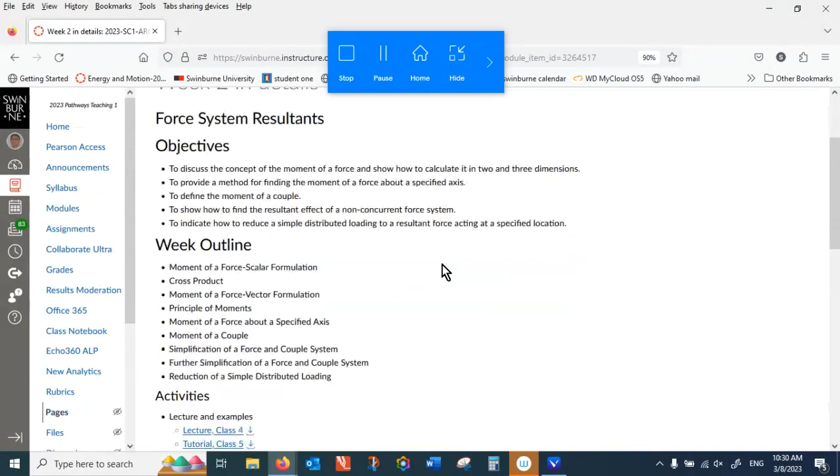Nijil, you're an international student, are you? Yes, from India. And you plan to go to higher ed once you finish this diploma? Yes, I'm planning for electrical engineering. Oh yeah, they'll be lucky to have you. Thank you.

And what about you? What discipline do you want to do? I'm doing software engineering. Oh, that's good. And have you done any programming before? No. So will it be hard if I'm not familiar with that?

Yeah, there is something called algorithm. If you're familiar with algorithm, that is the systematic thinking of how programs work. Loops, repeat, movement of the command or something like that. And then few languages, computer languages, are more useful than the others. In my time, I did computing, Fortran was very good, and C language was good. I chose Fortran, but Fortran these days is not used as such.

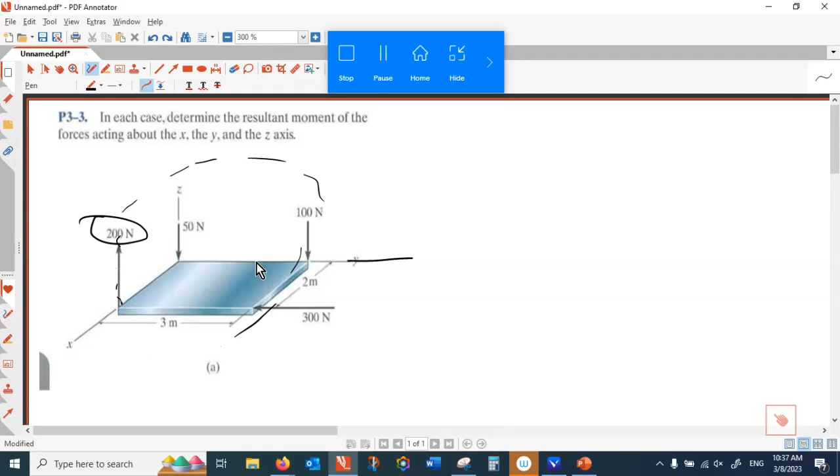Okay, so the moment due to 200 is... is this positive y or negative y? Just take your four fingers to follow the direction of rotation, and your thumb would be opposite to the y direction. So if I want to write that in vector, don't worry, I'll explain.

So this is the magnitude. Magnitude is 200, and the radius is 2 meters. And that makes - just use your right hand, 4 fingers following the direction of the rotation - 200 with respect to the y, your thumb would be opposite to the y. So that is minus j.

So it's anti-clockwise, right? Don't worry about clockwise, counterclockwise is only when you want to add the scalars. So when you don't know how to add the scalars, clockwise, counterclockwise help you to classify them, and this is a convention. But this is about the vectors. Vectors are with the unit vector, and we are using the right hand rule.

And let's see what 50 Newton does. The moment of 50 Newton, does it make any rotation about x? It's colliding with x, it doesn't. With y, colliding with y, doesn't. Colliding with z. So that 50 Newton doesn't make any rotation with respect to the x, y, z. So that's 0 moment.

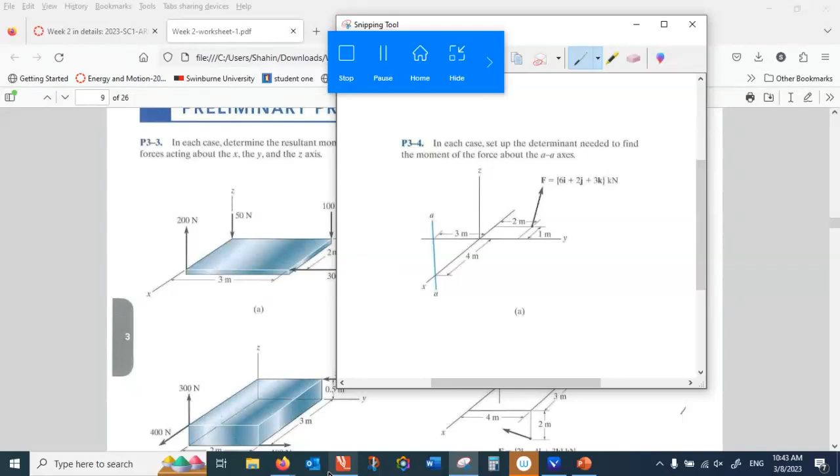All right, here we want to find out the rotation about an axis. Rotation about an axis is a scalar. Rotation by itself, moment, is a vector. If you want to project it over an axis, what do you do? You do a dot product between the rotation vector and the unit vector of that axis. So in another term here, I have a unit vector of AA - a unit vector for AA as an axis of rotation. So axis of rotation - you remember these doors have a hinge. So axis of rotation is that the door can rotate not about a point, but about a line. That line we call the axis of rotation. Here, AA is like a hinge for a door - that's not a point, that's a line. The door is rotating about a line.

Yes? Yes? All right. So here, two different things I want you to distinguish. If I say, what is the rotation about point O? Okay, that's a vector - it can rotate about X, Y, Z. It has three components. But if I ask you what is the rotation about the axis of rotation, that's not a vector - that's a scalar. And how do we find it? So first you have to find...

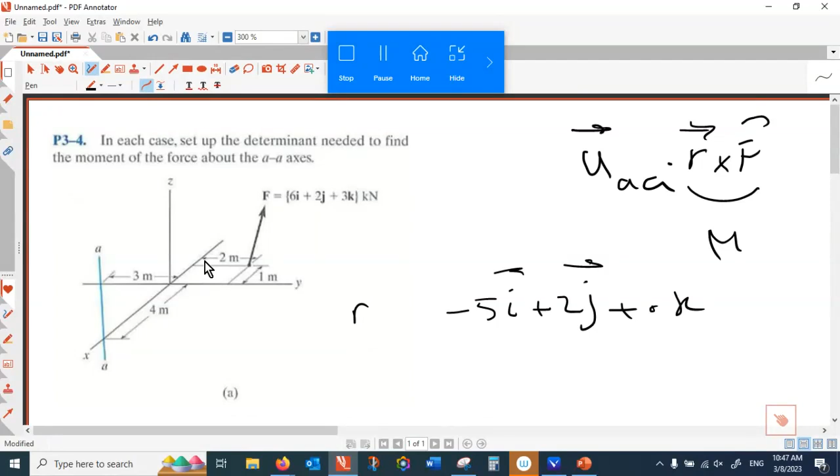That's a position vector, plus 0k. That is r, the position vector which connects the vector to the axis of rotation. Any line connecting them could be used - that's the only line we have. And then the force components, we have it.

And what is the unit vector of AA? AA seems to be parallel to Z, okay? So the unit vector of AA, that is equal to K, isn't it? This is parallel to that, that is unit vector.

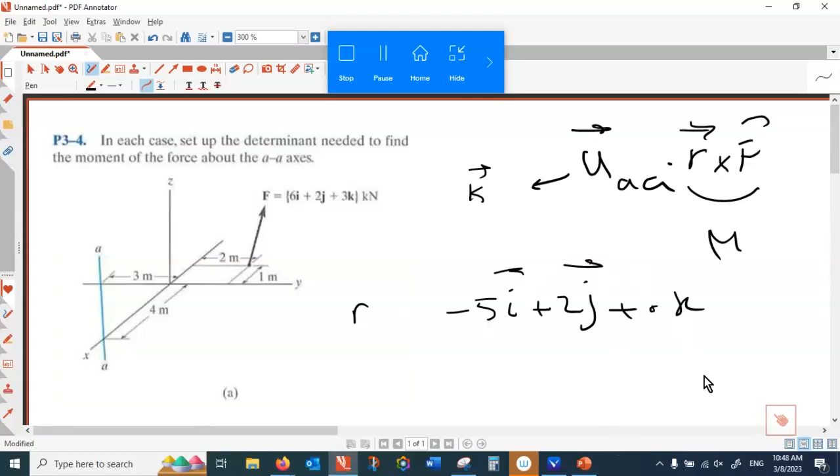So if I want to write this, first, the moment about that axis, you make a determinant. Here the first row you fill in with the R components, -5, 2, 0. The third row you fill it with the force component, 6, 2, 3. And then if you pre-multiply that by K, take it as a recipe.

When you project a moment with respect to an axis, that's what you get. What are we calculating here? Let me explain. This is UAX, UAY, UAZ, RX, RY, RZ, FX, FY, FZ.

So just in the top row, if I want to calculate the moment as a vector, I have i, j, k. But when I want to project it over a vector, I take that ijk away and put the unit vector of the axis here. And then the outcome of this is not a vector, this is a scalar. So instead of ijk, I put the direction cosines for that here.

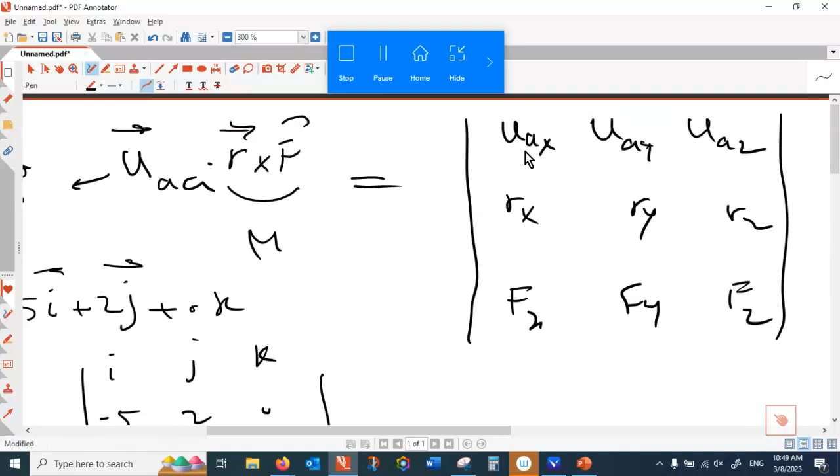So if I go with that, this is for the axis of rotation 0, 0, 1, and for the position vector -5, 2, 0, and the force 6, 2, 3. That determinant, the outcome, is a scalar, it's not a moment, because that's rotation about an axis. Rotation about an axis is not a vector. This is a recipe, I can prove it for you.

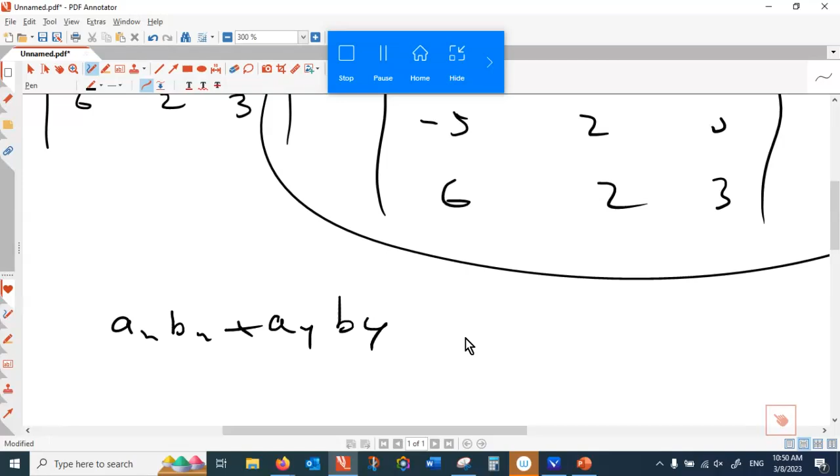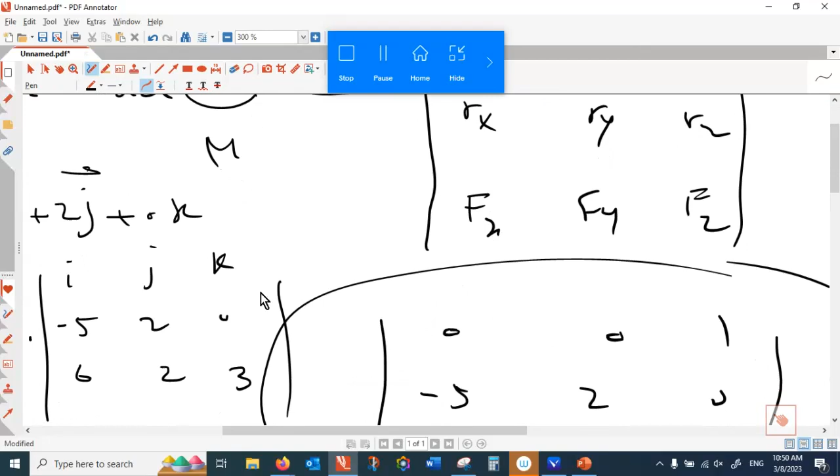When you pre-multiply a unit vector by another vector, remember we had this: if two vectors are dot product, that's ax*bx plus ay*by plus az*bz. That's when you dot product two things. The very same thing happens here. You are pre-multiplying the unit vector of that axis with another vector, and if I want to write this, that's a convenient way of doing that. You construct a determinant.

In that determinant, you fill the first row with the unit vector of that axis, the second row the components of the position vector, the third one the components of the force. So what you take from this exercise, I want you to just think about the concept, don't worry about the number crunching.

The concept: what does it mean if I have a force about a point? A force about a point can make a three-dimensional rotation. That three-dimensional rotation is a vector. We call this moment, moment about a point. If I have a force and then I have a line, this force with respect to that line produces a rotation, but that rotation is not a vector, that rotation is a scalar.

This is like I have a door, right? This door can only rotate about this axis. It cannot rotate like this, it cannot rotate any other way, it can only rotate about an axis. So no matter how I apply the force, it only can rotate like so. If I push it normal, if I push it at an angle, it only rotates like that. So that is rotation about an axis - this is a scalar, it's not a vector.

But if I only hold this from here, one fixed point, and a force - if I change the angle of the force, the rotation changes, right? So that's when you have a force and a point, the outcome would be a vector, a three-dimensional rotation. But when you have an axis, pushing it, no matter how you push, it only can rotate about that one.

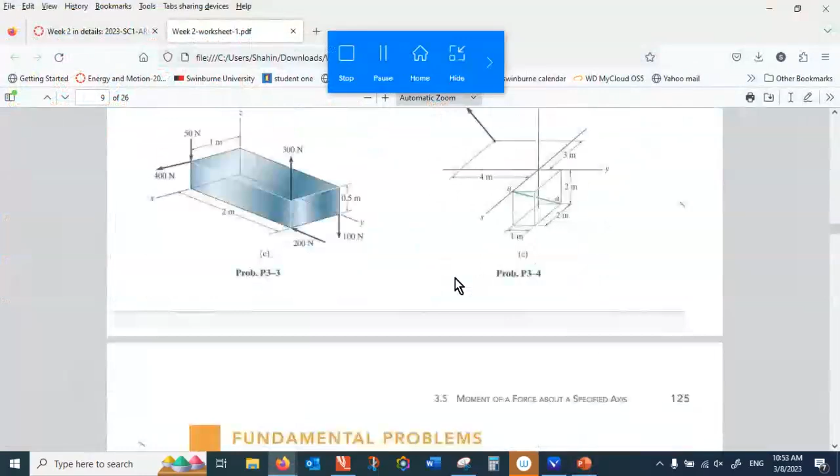All right, here in the first example, that is a force with respect to a point. Is that a vector or a moment, a scalar? F3-14, a force, a point of rotation. This would result in three-dimensional rotation, right? So that's a vector. How do we find it?

You have to define a position vector. Position vector is OB, and you have to write a force. The force is also provided as a vector.

And let's go to, for example, 17. So a force about AB axis. Is this a result in a scalar or a vector? That force compared to a line about the axis of rotation. Axis of rotation is AB. Is it? It only can rotate about that line. It's not a three-dimensional rotation. That's only. This is a hinge. The brick would rotate about that axis. Can you imagine that? Yeah.

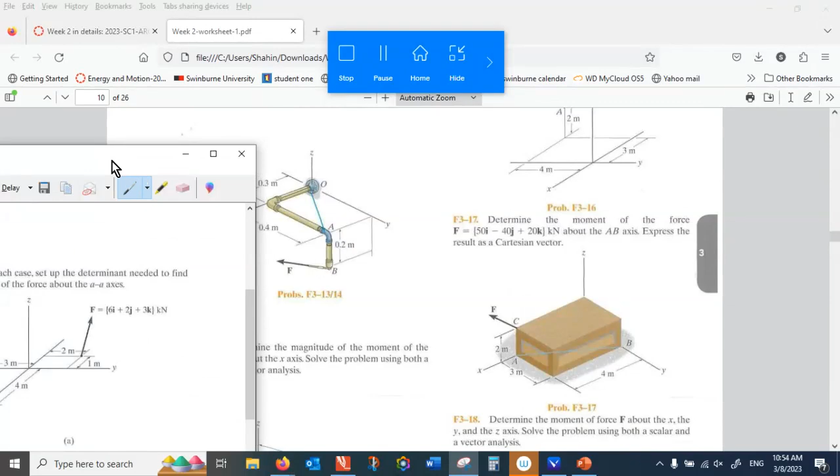All right. So how do we do it? I can do the number crunching or show you how this is done, but more importantly, I want you to get insight. If I ask you this force with respect to O, that makes a three-dimensional rotation. That's a vector. If I ask you the force with respect to AB, that's not a vector. This is a pure rotation. That's a scalar. Okay, how do we find this one? Let me write down the formula for you. So this is a good problem to get the concept.

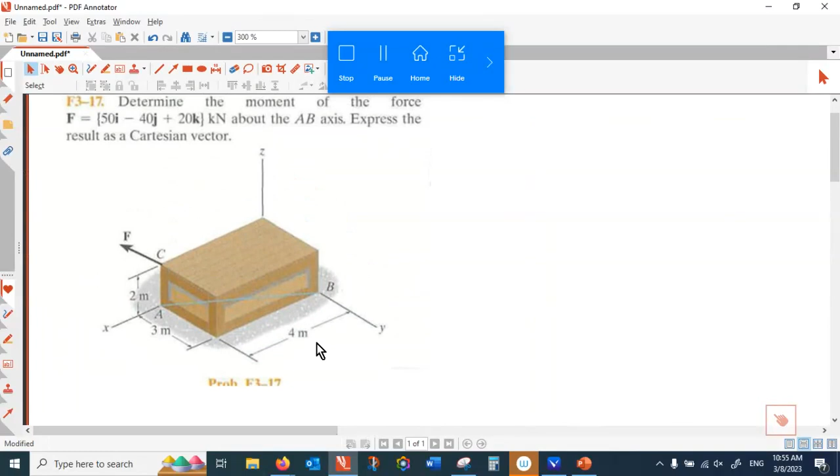All right, so what do I need is the unit vector of AB. I need that. And then I need the position vector. I have to connect from C to any point of that line. So it could be CB, it could be CA, it could be anything, right? So I need a position vector, and that position vector, I extend this one, and the position vector could be any point from this line of action to that vector - could be CA, could be CB, even it could be a point from here to there. But the only points we have coordinates for are A and B.

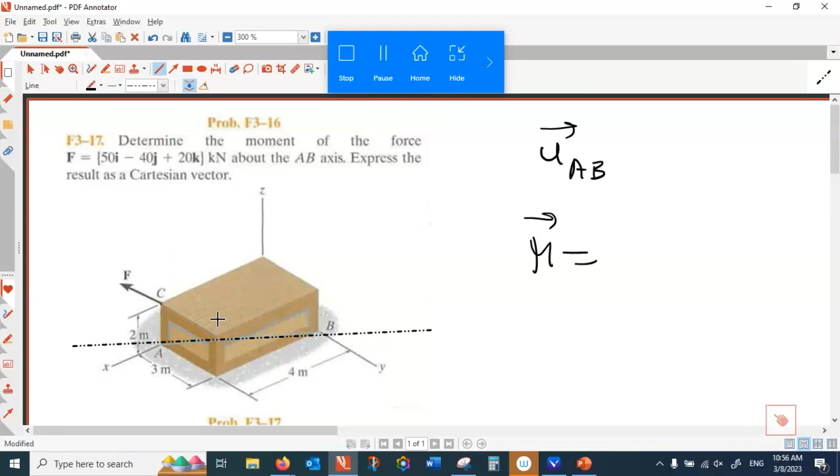So which one is easiest? Is it easier to describe AC or BC? Which one is easier? AC is easier, right? So AC, I take that as a position vector. So that is R multiplied by F. Okay? And then that is UX*I, UY*J, UZ*K.

So to find out, this is rotation about a point. How do I find rotation about the axis? Rotation about an axis, I have to pre-multiply UAB by that product. And how this is written, that is, you make a determinant. In the first row, you fill in three components of the U, UX, UY, UZ - these are for AB, the axis of rotation. In the second row, you put the coordinate of R: RX, RY, RZ. In the last row, you fill in the components of the force, Fx, Fy, Fz. So apply to this case.

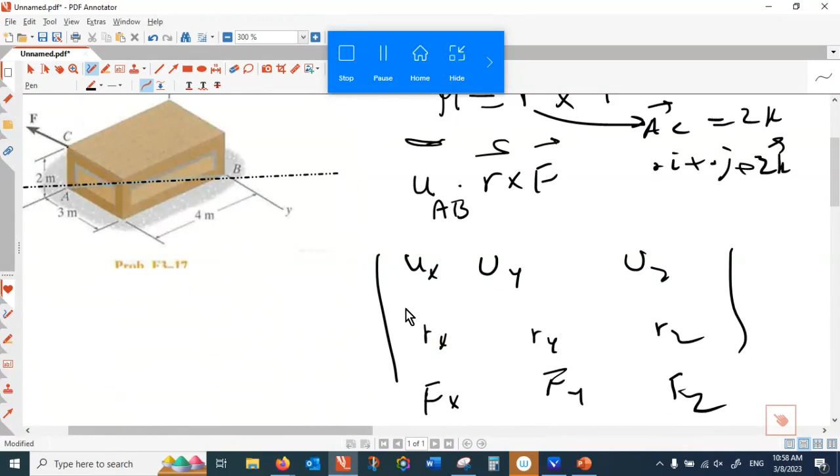Okay, we easily can find the unit vector of AB. You know how to find the unit vector. And what is the position vector? You suggested the position vector connecting the force to the axis of rotation to be AC. So that is AC. This is taken as AC, and AC is what? AC is 2K, right? And 2K is 0I plus 0J plus 2K. So when I want to fill here, I put 0, 0, 2.

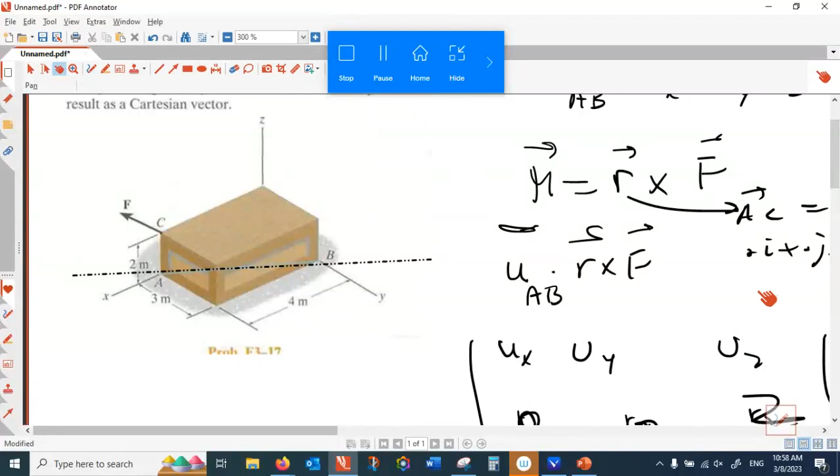And when I want to fill in here, I put... Sorry, can you just read this part again? Where you wrote 0, 0, 2? Which one? How did you write 0, 0, 2? How did you do it again? Okay, you want to go from A to C. What is the vector? You just go 2 meters along the K. That's 2K. 2K has 0I, 0J. So if you write that vector in a three-dimensional case, this is 0I, 0J, 2K.

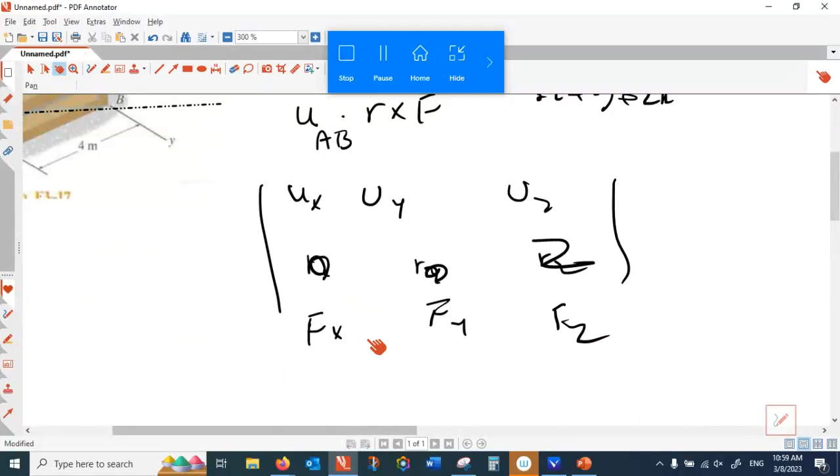And then you fill here 0, 0, 2. Right? Okay, and finally F, where are the components of F? The components of F are 50, minus 40, 20. And what about the unit vector of AB?

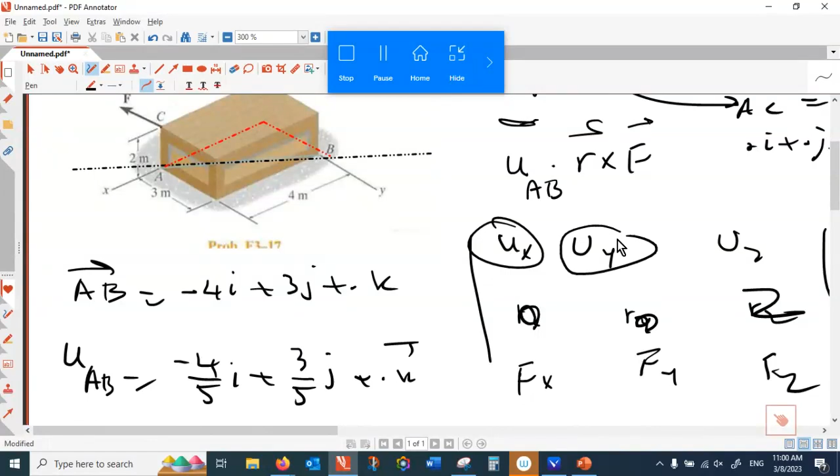I can show you quickly the unit vector of AB. You want to go from A to B. How do you go there? I personally go minus 4 along the X direction, followed by 3 meters along the Y. So in that journey, AB is minus 4I plus 3J plus 0K. Okay? And then the unit vector for that, using 16, 9, 25, 5... the unit vector is minus 4 over 5 I plus 3 over 5 J plus 0K. Right? Now I put these components here: minus 4 over 5, 3 over 5, 0.

All right? Not a big deal. I mean, it looks very hairy and scary, but once you understand the difference between moment about a point and moment about the axis, it's straightforward.

One is making three-dimensional rotation, the other one makes the scalar. How to calculate the scalar? Don't worry about the derivation, exam is not about derivation. All you need is that formula. You pre-multiply the unit vector of the rotation axis by the vector of rotation. So vector of rotation are Rx, Ry, Rz, Fx, Fy, Fz. And the first row, you only put that of the unit vector for the rotation of axis.

Could you go to the slide again? Yeah, let me go there. Yeah.

Why did you choose engineering? The other class, whatever subject they're having, fun, listening to music, while you are doing tough things.

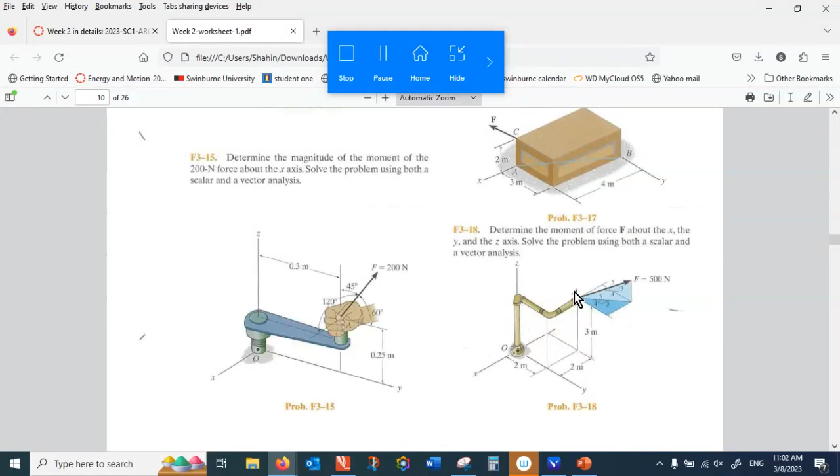Well, the very same thing here. With that problem, can you tell me 200 with respect to O? Is that a vector or is that a scalar? Vector. And 500 Newton with respect to the OA, is this a vector or a scalar? Okay, good.

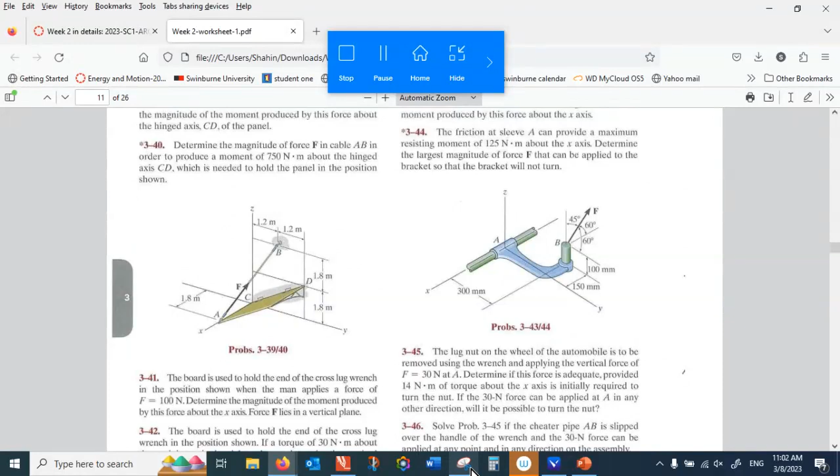All right, so this is easier to visualize. I mean, that's a star question. It means that's super complex, but for you, that should be piece of cake.

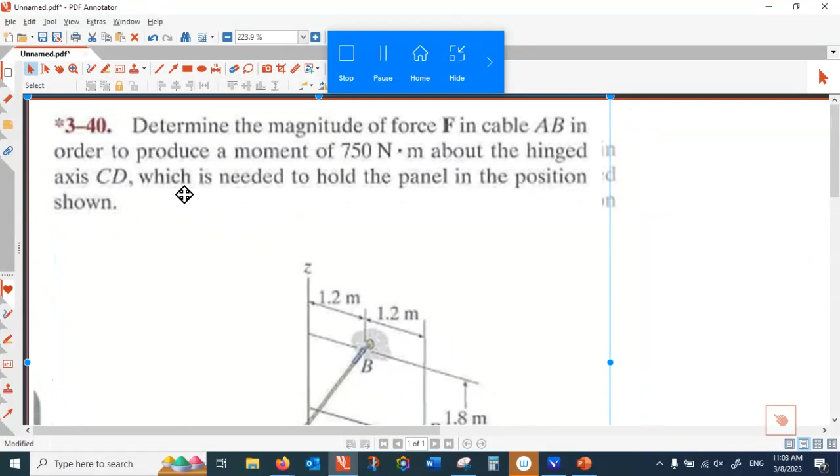Okay, let me summarize what you missed. I want you to make a difference between two different concepts. One concept is you have a rigid body, this is a rigid body, and with this rigid body, you can only fix a point, only a point, right? So it means it can rotate, it cannot translate.

So if you want to push it in the X direction, you can't. If you want to push it Y, Z, it can rotate. It is only free to rotate, rotate about the X, rotate about the Y, rotate about the Z. But you can't move it, not translate. Translation you cannot, because this prevents that from translation. But rotation you can, rotation about that point.

So if this object is fixed at a point and you apply a load, it makes a three-dimensional rotation. It depends how I apply the force. If I change the direction of the force, the rotation would change. So that is the first concept: you have a three-dimensional force, one fixed point. The outcome would be a moment, and a moment is a three-dimensional rotation. All right? So that is the first concept.

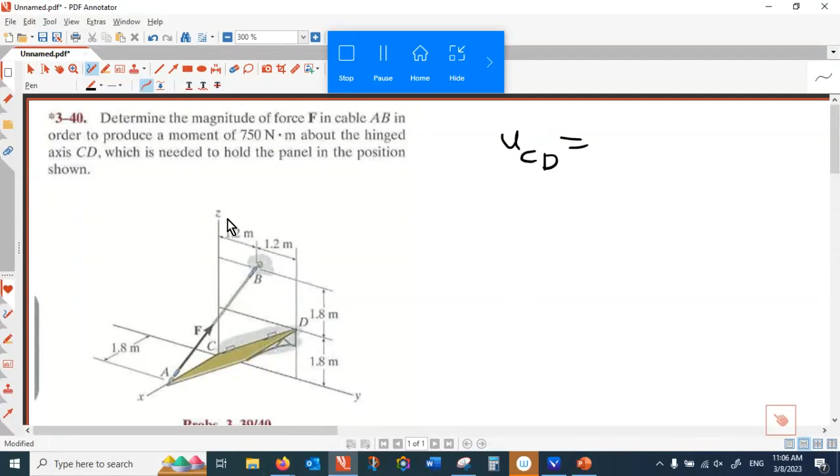So, well, I can write F in this way. F is equal to magnitude of F multiplied by unit vector of AB, right? Correct? All right. And what about the position vector? The position vector is a vector which connects one point from the force to one point from the axis. So the easiest one is AC. AC is easy. So if I write AC, AC is what? 1.8.

Could you repeat the line again? Why are we taking AC? Could it be AD or AC? No, we are taking AC because it's the shortest. Which one is shortest? Why are you taking AC? That's all.

Because this is the axis of rotation, CD, and you have to choose one point from the axis of rotation, choose one point from the force, and connect them together. The easiest way is CA because it only has an X component. I could have chosen DA, but DA is a little bit more complex.

I think that's CA, not AC, CA, and that is 1.8 I plus 0 J plus 0 K. Why did you shift? Because the position vector is from the point of rotation to the vector, not from the vector to the point of rotation.

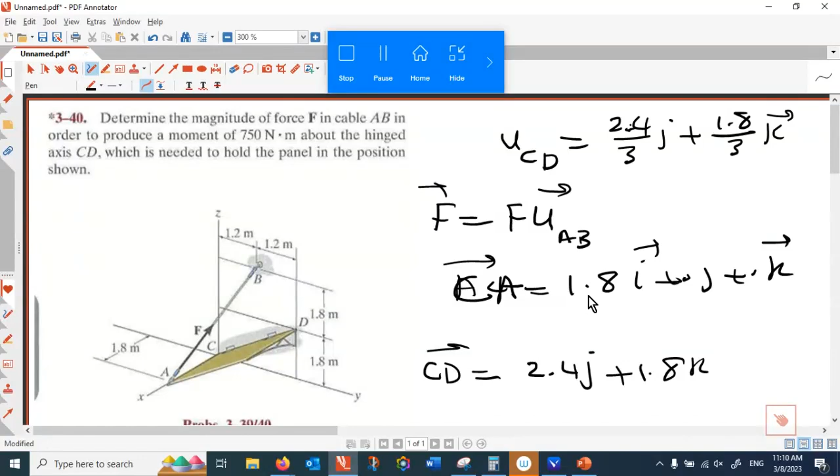And what about the next one, the unit vector of AB? So for the unit vector of AB, you want to go from A to B: I go minus 1.8 I, and then 1.2 J, and finally 3.6 K, right? 3.6 K.

This is not the unit vector, that is AB itself. That has to be divided by the magnitude of AB. So what is the magnitude of AB? Let me calculate.

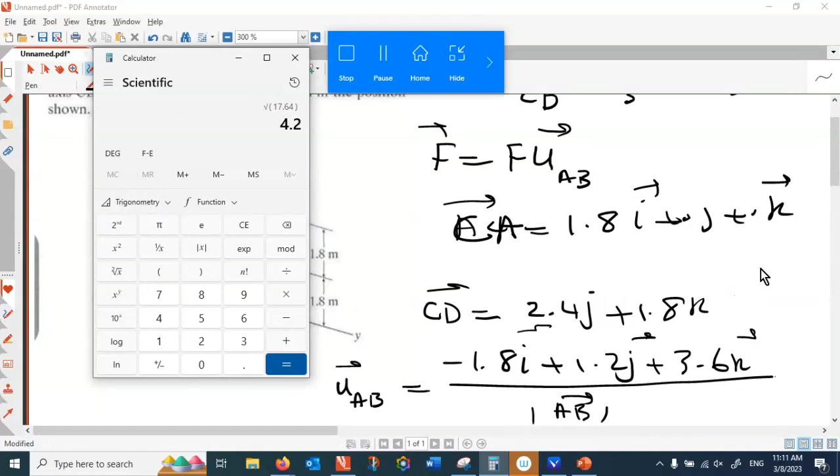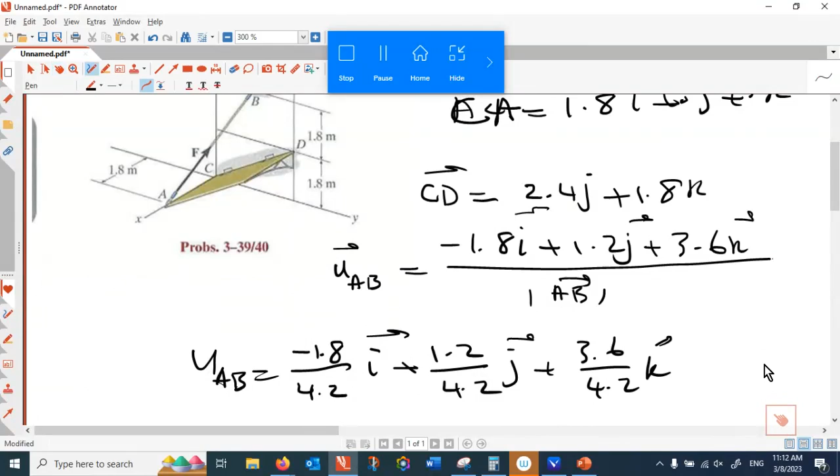This is 4.2. So the unit vector of AB is... all right, and now I can write the force vector. So what would be the force vector? The force vector is the magnitude of F multiplied by that unit vector.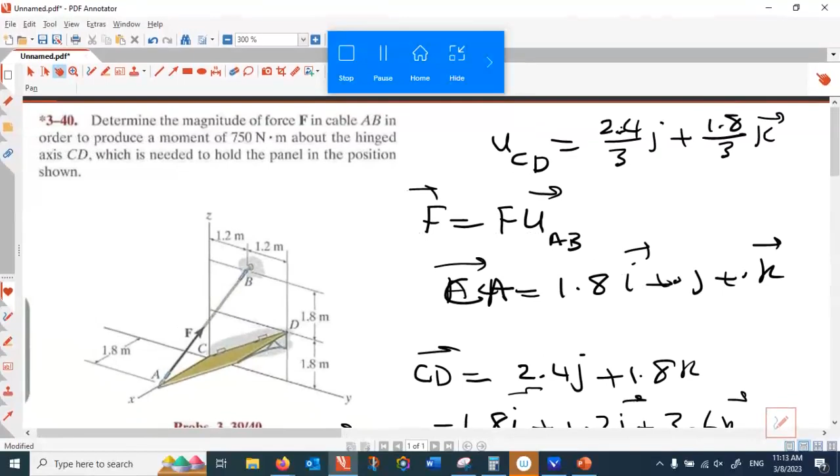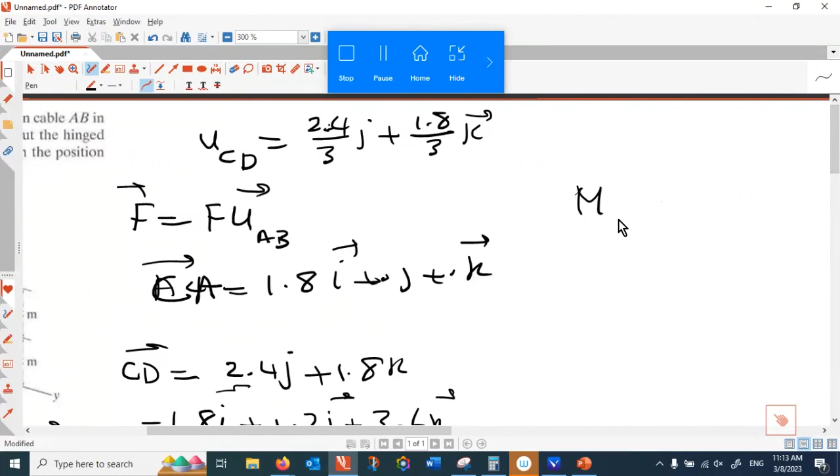All right, now I think we can fill that determinant, the determinant which gives me the rotation about the axis. That is rotation about, what was the axis called? That was CD, was it? CD. Did we calculate CD? Yeah, we did.

So rotation about CD, that is a 3 by 3 determinant. You can do it both with CA as well, right? You can do the dot product, or you can do the determinant. I can take CB instead of CA as well. CB, no, that's rotation about CD. The door hinge is CD.

So its unit vectors you fill in the first row: that is 0, 2.4 by 3, 1.8 by 3. And then the second row should be the position vector. What was the position vector? The position vector was CA, that is 1.8 here, 0 here, 0 there. And what about the force component?

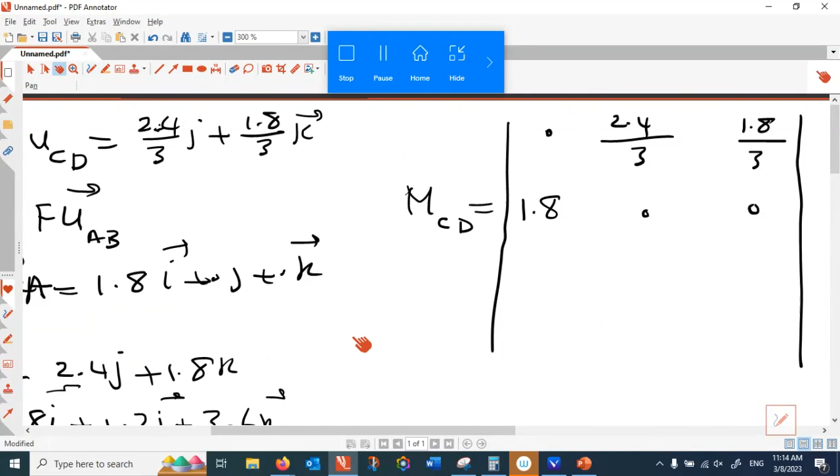The force components are: this is minus 1.8 F divided by 4.2, and the next one is 1.2 F divided by 4.2, and finally 3.6 F divided by 4.2.

And then this is an easy determinant to calculate. And you have to equate that to what? You have to equate that to 750 Newton meters. And then by solving that, you find the magnitude of F. That's easy. So the left-hand side is a scalar, but it has an F in it. The right-hand side is a number. So you divide both sides by that, and that gives you F.

So let me zoom out. You can copy the screen. Page 134.

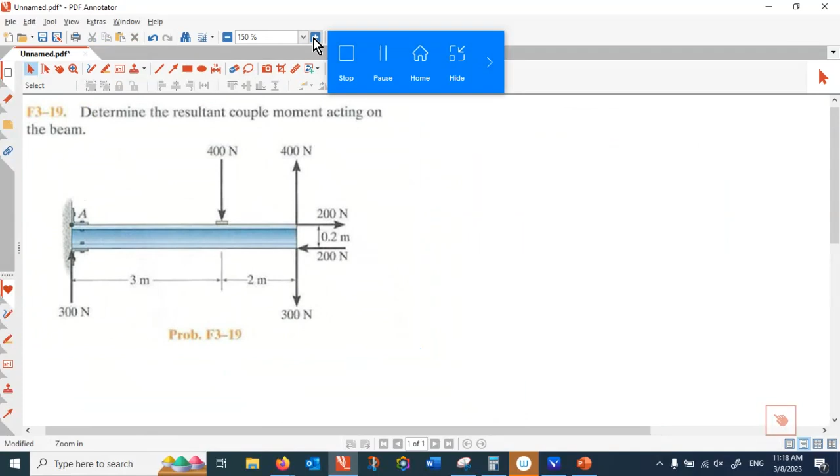So this is a frame. You want to put it on the wall, but you only have one pin. Put this pin anywhere you want, any one. You just fix it to the wall with one point. And then if that frame is on the wall and is fixed with one pin, you apply 400. How does the frame rotate? So the pin is not on, yeah, it is anywhere. It rotates clockwise or counterclockwise. Just watch me - if the pin has to be on the beam.

This is a frame, it's a family album, it has my grandfather on it. All right, I put it here, but I'm short of the pin. Only have one pin. I fix it to the wall, and then 400, 400, 400, 400 apply. Does it rotate like this or that? This way? Yeah. Counterclockwise. Okay.

Well, overall, the problem is very similar to the previous one. The only difference is if I want to calculate the couple, it requires the shortest distance between the forces. So how do I find the shortest distance? That might need a little bit of... trigonometry, if I want to do it this way. So I have to find the shortest distance, is this one, right?

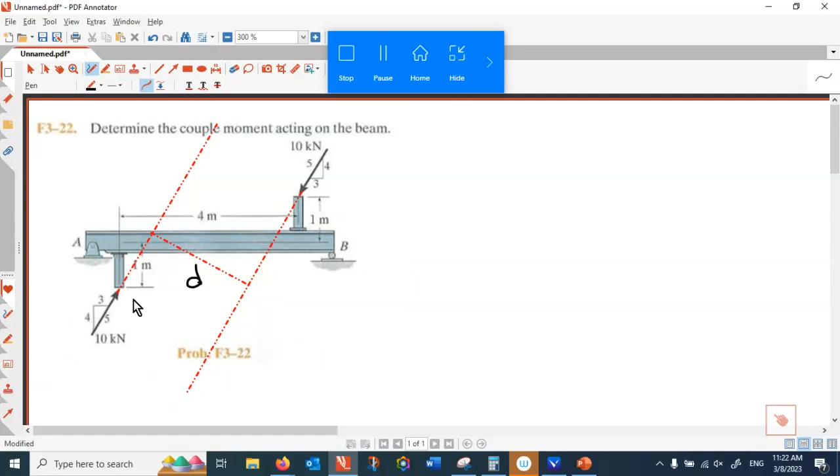Okay, if you are capable of calculating that one, that's easy. To find out the couple, that is 10 kilonewton multiplied by this shortest distance between the two forces, that's D. That's one way. And is this going to be clockwise or counterclockwise? Clockwise. But we want to do it in an easy way.

So to do it in an easy way, any suggestion? How can I do this even easier? Can I break the forces into their components? What happens if I break the forces into components? That's what's going to happen. So 10 kilonewton projected horizontally, 10 kilonewton projected vertically, right?

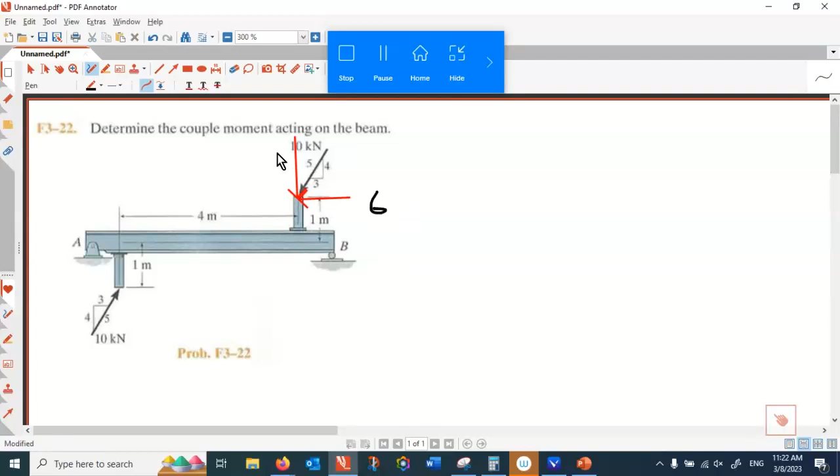And then this force 10 kilonewton doesn't exist. If I project it here, 10 multiplied by 3 over 5, that's 6. And 10 projected over here, that is 10 multiplied by 4 divided by 5, that is 8. So I'm breaking that force into 8 and 6, one being vertical, one being horizontal.

The very same thing I can do here. So I break that one into two forces, and this doesn't exist anymore. And now this is 6, that is 8. So how many couples are there? Two couples. One couple is a pair of 6 and 6. The second couple is a pair of 8 and 8.

So the pair of 6 and 6 is counterclockwise, that's positive, and the distance between them is 2 meters - the shortest distance between them is the 2 meters. And the pair of 8 and 8, that is clockwise, and the shortest distance between that is 4 meters. So we just avoided doing the trigonometric calculation by breaking the forces into the components.

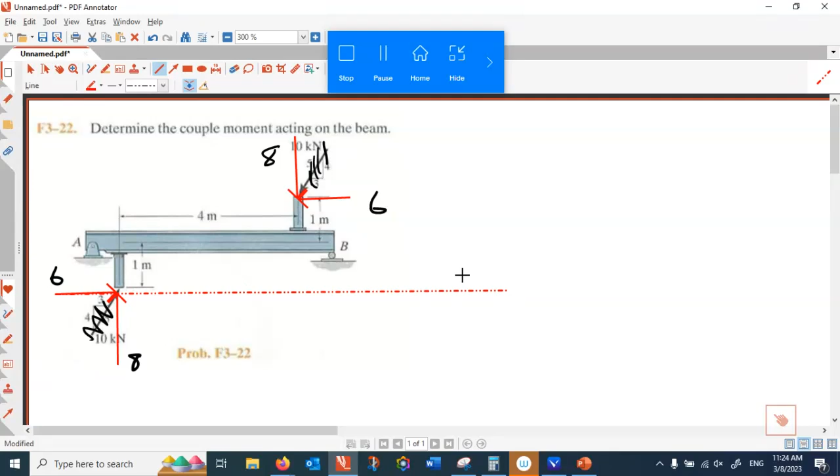You could have done it in a more sophisticated way. How could the distance between 6 and 6 be 2 meters? Good question. All right, so whenever you are not sure, just extend the line of action, right? So I want to go from here to here - 1 meter, another 1 meter from here to there. The vertical line - yeah, 2 meters.

Question: could you explain the diagram, the whole diagram? You want to explain it again? Yes, all right. So we did have two forces of equal size, opposite direction - that is the classical definition of couple. A couple is when you have two forces, equal magnitude, parallel, opposite direction. And to find the magnitude of the couple, that would be 10 multiplied by the shortest distance between 10 and 10.

But finding the shortest distance between 10 and 10 is not easy - you have to do some trigonometry. So if you can do it, no problem, you get the answer, and the answer is going to be clockwise. But if you are lazy like me, you would break that forces into parallel to the dimension which are provided.

What dimensions are provided? The dimensions of 4 and 1 are provided. I'm breaking that in parallel to the 1 meter, 4 meter. This is the XY coordinate. If I want to define an XY coordinate, that's how I define them. That's X, this is Y. Why did I choose that coordinate system? Because they're parallel to the dimensions which are provided, it's convenient. Then projecting these forces into components, that I hope everyone can do.

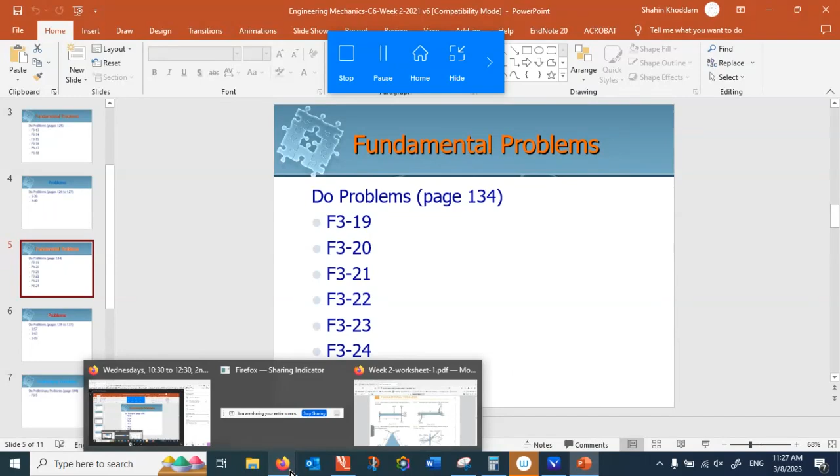All right, going back to the problem sets. Now we jump into 135. Maybe we still can do something from 134. What about the F23? F323? Give me the number. F323. Yeah, 23, let's do it. That's a good choice.

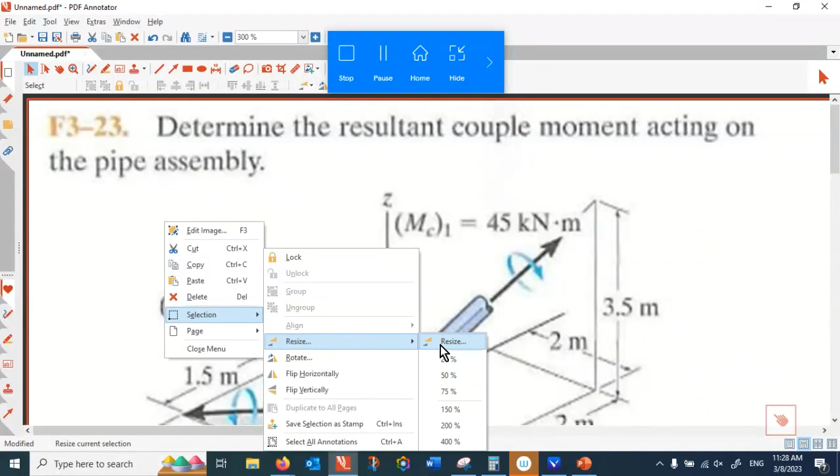All right, here we've got three moments and we want to combine them together. So how do we combine vectors? We just add them, but that has to be a Cartesian addition. So for every vector, you have to write them in ijk. It's easy to write MC2 as a vector. How do we write MC2 in terms of vector?

We'll start with the easy one. MC2, how do I write it as a vector? The magnitude is 25 kilonewton meter. But what is the unit vector? Just use your right hand. Four fingers are following the direction of the rotation. Your thumb, does it show positive Z or negative Z? Negative Z. So I have to write this as minus 25K. Any objection to that?

Let me explain again. So your four fingers, right hand, they are following the direction of the rotation, and your thumb, does it show positive Z or negative Z? Negative Z, and that's minus K, right? The unit vector for that is K.

All right, so the trick is going to be with M1 and M3, because we have the magnitude, but the unit vector of that we have to construct. So how do I construct the unit vector of 1? Unit vector of 1, I'm trying to construct it.

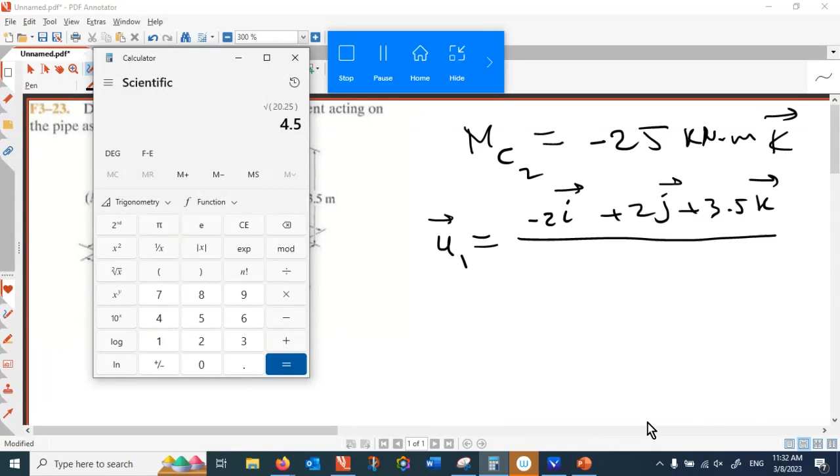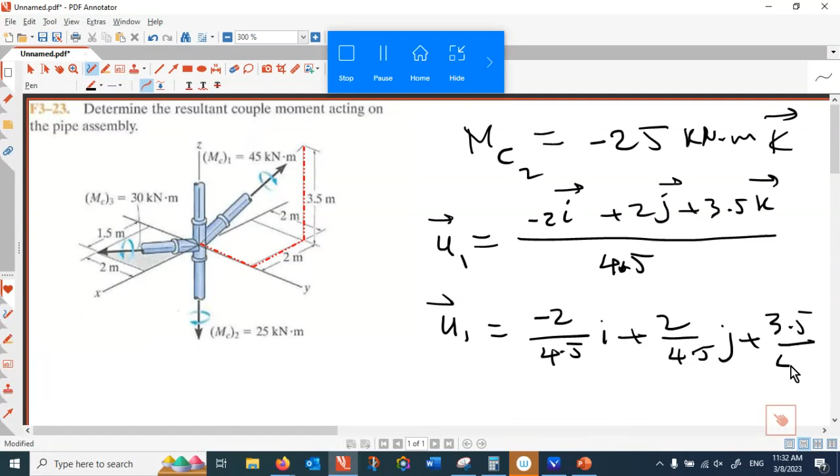So the unit vector of 1 is minus 2 over 4.5 I plus 2 over 4.5 j plus 3.5 over 4.5 k. Yes? Now we are able to write MC1 as a vector. MC1 as a vector is the magnitude of MC1, which is 45, and that is positive U1 — your thumb shows the positive of U1 — multiplied by this unit vector.

Why are you multiplying this? I have to multiply that together. So yeah, 45, 4.5, that's 10, right? So that would become easy to calculate.

MC1, that is minus 20I plus 20J plus 35K, okay?

So we do the same thing for the last vector. You multiplied MC1 with the unit vector. I multiply the magnitude, which is 45, by the unit vector, and 45 divided by 4.5 is 10. 10 multiplied by this term makes it minus 20, 20, 35.

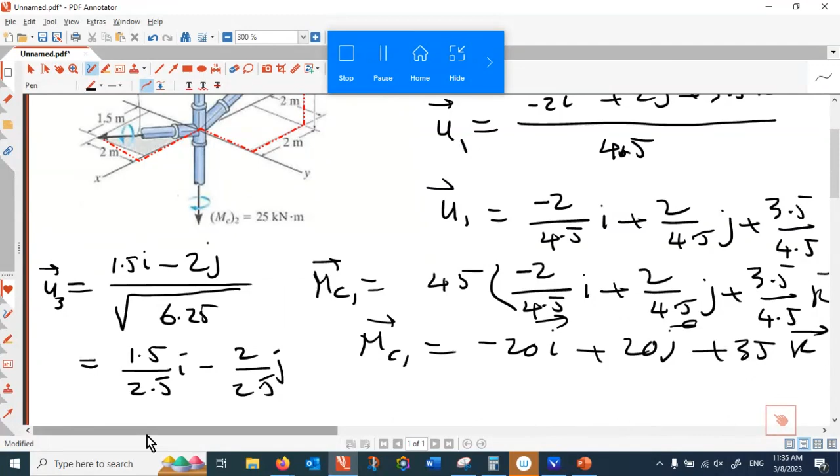All right, so now we managed to find the unit vector of the third one. If that is multiplied by 30, which is the magnitude. So M3, the moment of the third one, that is its magnitude, 30, multiplied by the unit vector.

And what do we do last? We want to combine them. So three vectors, how do you combine them? Easy, just add I components together, j components together, k components together.

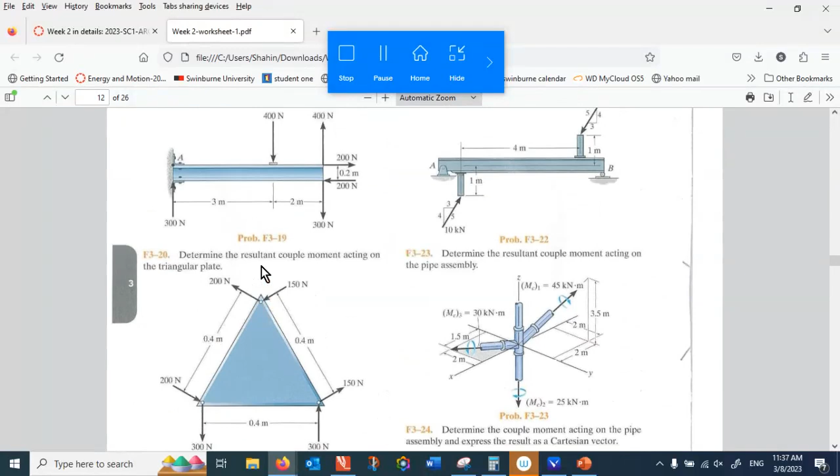I think we can do these, these are good conceptual questions on this page. We can do as many, even 20, 21, 24, whichever you want, and we can do all of them. We didn't do number 20 type of thing. Which one? 20. 20, yeah, let's do 20.

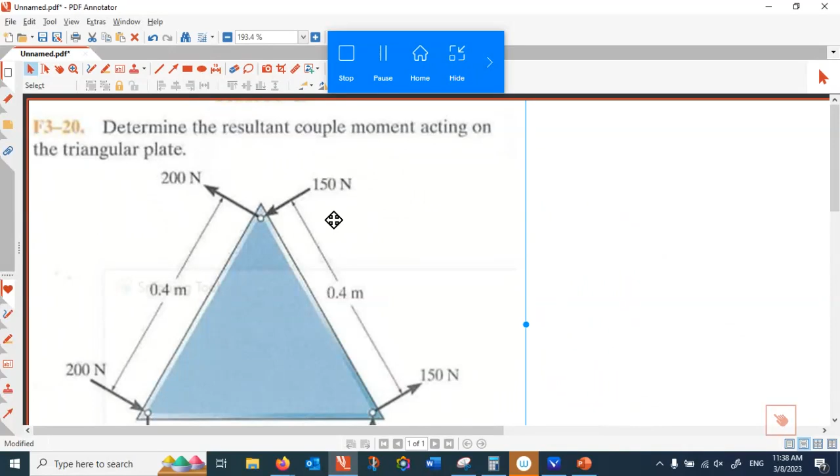Okay, tell me how many couples are here? Three. And that is very straightforward. So the first one, I mean, all of these are two-dimensional planar. We have to do this in a scalar way.

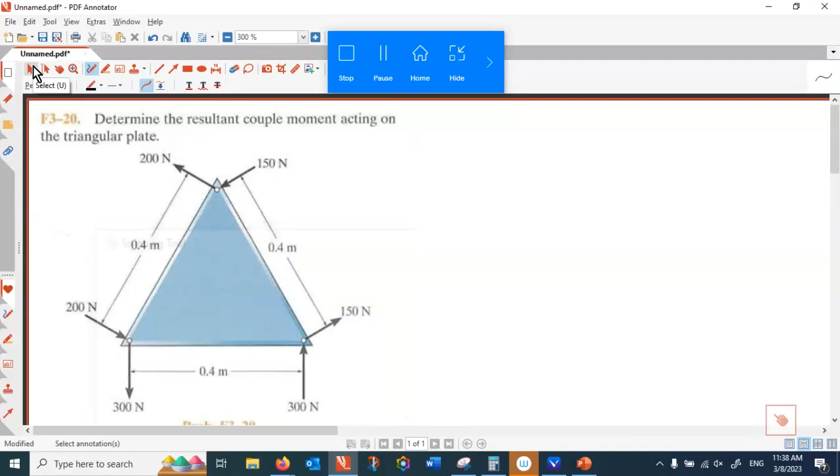And then the couples are coplanar. How do we add them? Is this counterclockwise or IJK? Counterclockwise is easy. So with the counterclockwise concept, the first component of the couple is 150. That is 150 multiplied by 0.4, which is 60, right? 60 Newton meter.

And if these are my x and y components, is this going to be clockwise or counterclockwise? Counterclockwise, that's positive.

Yes, so 150, 150, there are two parallel forces, opposite force. That's the definition of the couple. A couple is when you have two parallel forces, equal magnitude, opposite direction. That is when you want to fasten a screw, or loosen a screw, you apply a couple. Okay?

So that's a one-dimensional rotation, that's what you apply to the screwdriver. 150, 150, the tip of the screwdriver, when you rotate, one resists this way, the other one resists the opposite way. So that's how much couple you apply to it.

So that is due to the 150, 60 Newton meter, and that is in the counterclockwise direction. That's positive. Or if I want to stick to the IJK definition with this coordinate system, that rotation is positive I or negative I? Positive. Positive I. Positive K, positive K. So that is positive K,

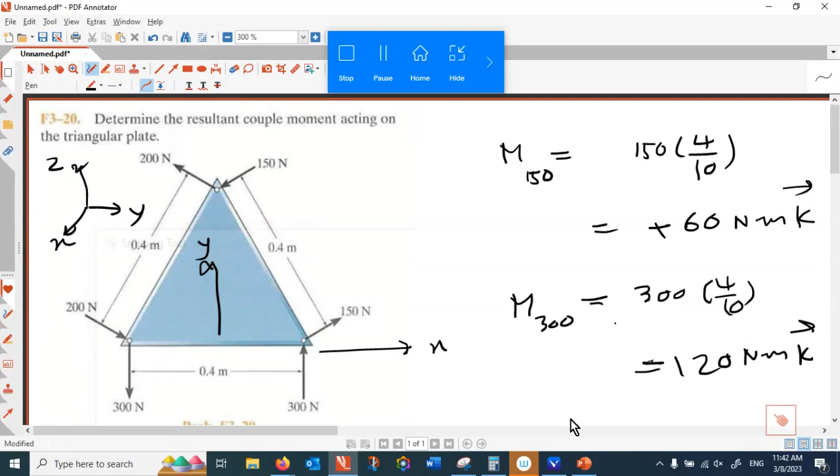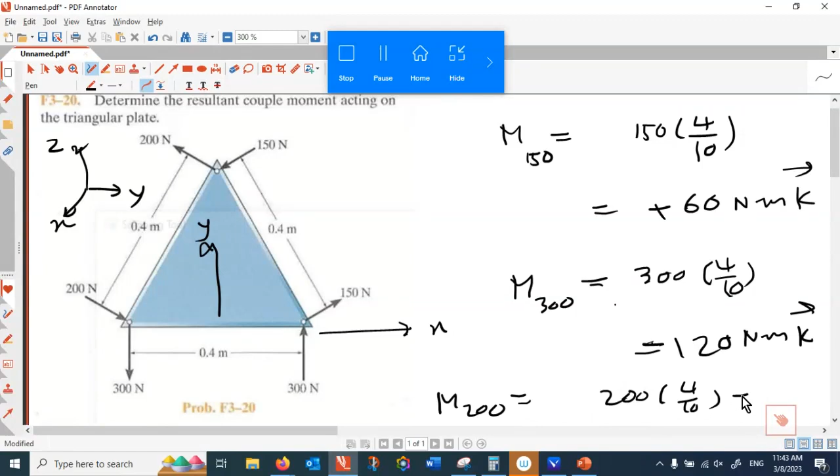300, that comes out of the plane, that is positive K again. And the last one, M of 200, that is 200 times 0.4, is 80 Newton meter, and again positive K.

Okay, all you have to do is add three numbers together. Excuse me, sir, I'm so confused, how do we do it?

Okay, right hand, you hold it like this. So this is the thumb, this is the forefinger. You bend it like that, toward yourself. And then let your four fingers follow the direction of the rotation, from x to y in the counterclockwise direction. And then your thumb shows the third dimension, which is z. So this is called the right hand rule.

So for every couple which we calculated, you know the direction of the rotation, let your four fingers do the rotation, and your thumb shows the direction, whether this is projecting out or projecting in. If it's rotating like this, it's projecting out. If it's rotating like that, it's projecting in.

Can you give an example? Let's take the example of 300. I hold my hand like this, right hand, and the rotation is that way, correct? For 300, the rotation is like that, so I rotate my four fingers, and the thumb is coming out of the plane.

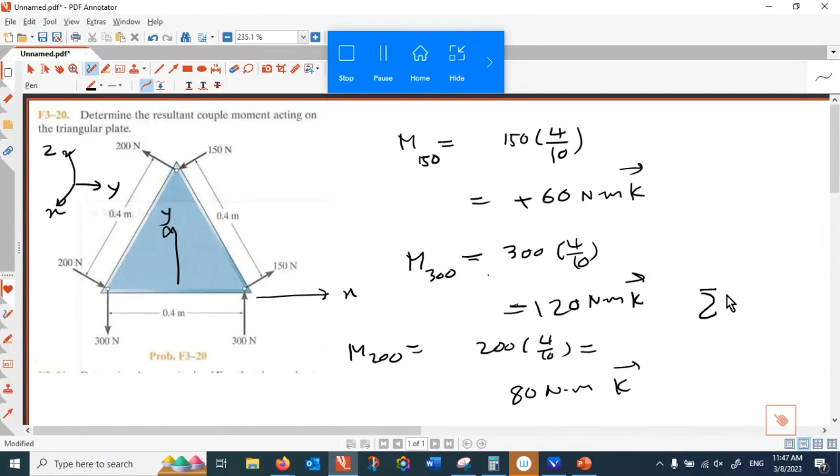All right, so we go to the next one. Let me zoom out. And here you add all three of them together, that's 260 Newton altogether. The total moment, that is 260 Newton meter.

It's going upward, right? Yeah. All right, we do that for 21 also.

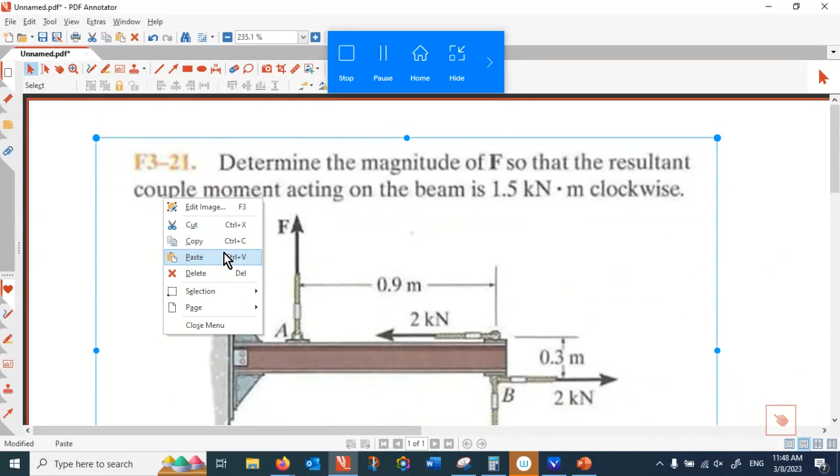All right, how many couples are here? Two couples. And you want the result of that to be 1.5 kilonewton meter. So what should be the magnitude of F such that the total couple is 1.5? What we do is find them one by one, add them together, set that equal to 1.5, and that gives you an equation. By solving that equation, you find the magnitude of F. So starting with the rotation, let me take my coordinate system like X and Y.

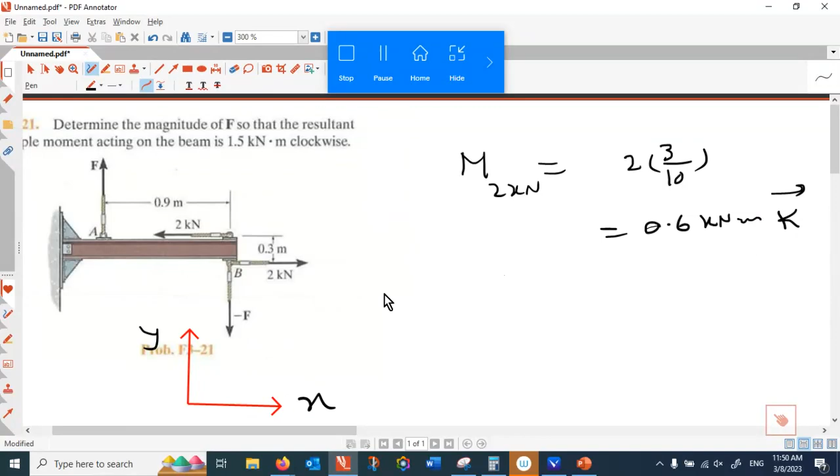Starting with the rotation of 2 kilonewton, that is 2 multiplied by 0.3, that is 0.6 kilonewton meter. And is this plus K or minus K? Plus K. Everyone agrees that's plus K. And what about the couple of F?

The couple of F, that is F multiplied by 0.9. And is this positive K or negative K? Negative K. And 1.5 clockwise — is this 1.5 K or 1.5 minus K? Why is it minus? Because with F, if you rotate like that, that is inside the plane, so outside the plane is positive K, inside the plane is negative K.

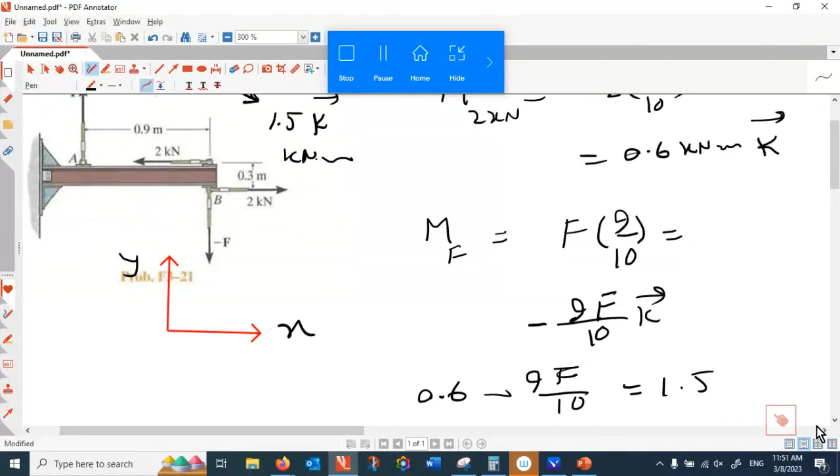So with that, the final outcome is 1.5 positive K, and the unit is kilonewton meter. So both sides of the equation, the units should be the same. So here I have 0.6 plus or minus 9F over 10, that is equal to 1.5. So if I take 1.5 to the other side of the equation, that is 0.9. So 0.9 is equal to 0.9 F. So F is equal to 1 kilonewton.

Can you please explain the direction of K for the people? All right, so in the three-dimensional sense, there are always three coordinate systems. We call this 1, 2, 3, or we call this X, Y, Z.

So you can look at this from the top. If you look at top, you only see X and Y direction. And then you might ask yourself, which one is positive Z? Is this coming out of the plane or is this going in? If you look at it like that, you don't make a mistake.

Try to do the right hand rule. So this is 1, 2, 3 or X, Y, Z. If you go from X to Y, Y to Z, Z to X, that's in a counterclockwise direction. So X, Y give you Z, Z, X give you Y. So in either of these two planes, you can apply the right hand rule.

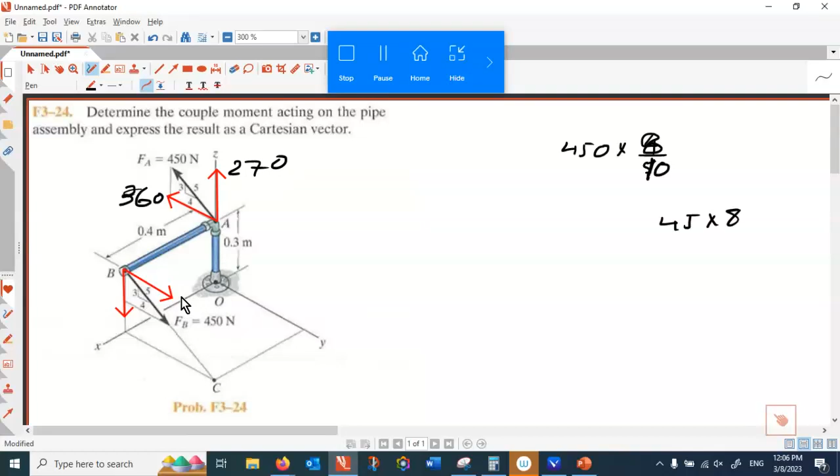If I resolve 450 into two components: 450 multiplied by 4 over 5, that's 360, that's the horizontal one. And the vertical one is 450 multiplied by 3 over 5, that is 270. All right, so this is 270, that is... sorry, this is 360, and this one is 270.

So this force doesn't exist anymore, we resolve that into two components. Now I have two moments to calculate. The first moment is the moment of 270. So what is the moment of 270? That is 270 multiplied by 0.4.

That's 108. Is this positive K or negative K? Sorry, I'm talking about 270. That is 270, J. Is this positive J or negative J? Negative J.

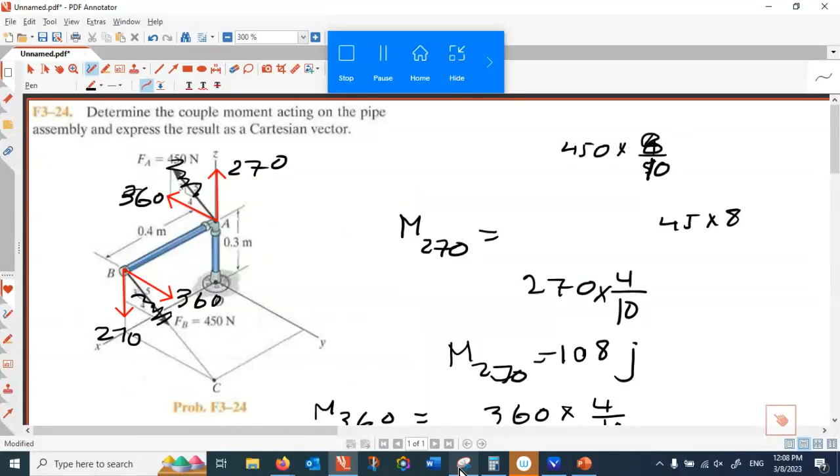And what about the moment of 360? 360 multiplied by 0.4 again. That is 144.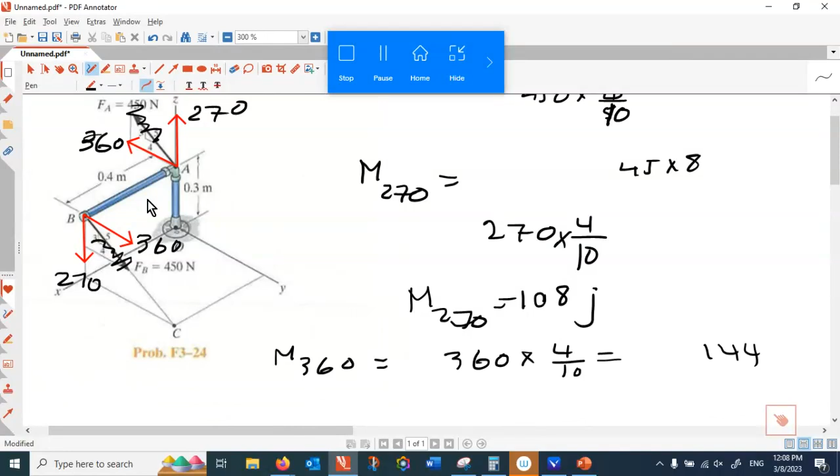So the 360 is perpendicular to Z, right? If you pass a plane through 360, that plane is in the Z direction. But with that direction, you get a positive K. Yes, that one is positive K.

Okay, so finally you have to add these two components. The total rotation is plus 108J plus 144K and 0I. That is the total rotation.

Can you explain what is positive J again? Positive J, that is 270. So does this rotate this way? I take my hand. How do you know it rotates that way? Look at the tip of the arrows.

The tip of the arrows shows you the direction. So you are looking into the ZX plane. The ZX plane is rotating like that. And if you rotate, your thumb would be parallel to Y, positive Y. Is it clockwise? That would be counterclockwise. If you look at that plane, 270 makes a counterclockwise rotation.

And why J direction? Because that's parallel to the y-axis. The unit vector for y is j. This is you're rotating this way.

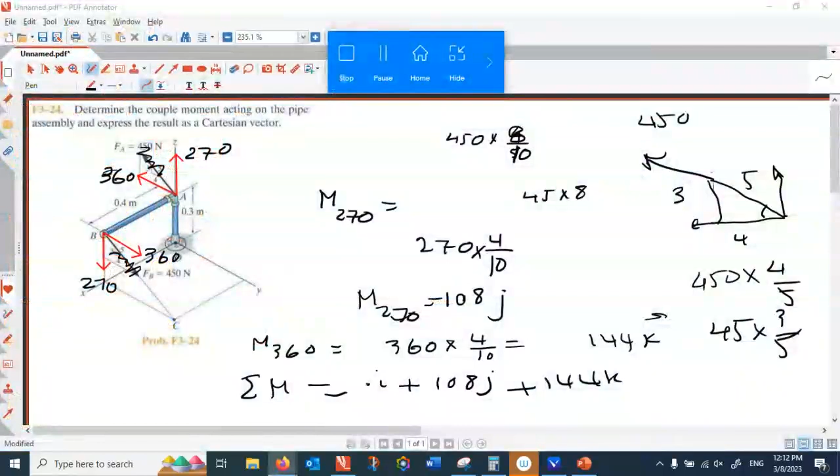This rotation cannot be about the y-axis. This is like you have an axis which is perpendicular to the plane of the two forces, and your system can only make a rotation like a door does. The door cannot do a three-dimensional rotation; it only rotates about an axis. So in this sense, the axis of rotation, the hinge, is normal to the plane that holds 450 together.

Can you pass a plane through the 450? Can you visualize passing a plane through 450? So that would be like this.